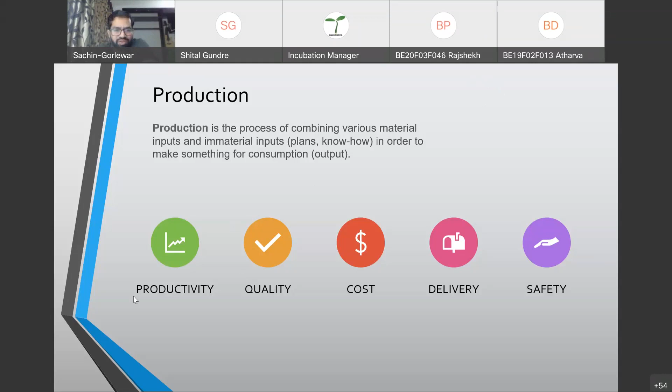Students, you may unmute yourself and you can put your answers in the chat box. Yeah. Right. So I'll move to the other part.

Now productivity, it's very simple. Productivity in manufacturing measures the number of units produced or net sales relative to employee labor hours. Okay. For example, if 10 people are working in the factory, what is the output? How much product is manufactured in a day or in an hour? So this is the definition of productivity.

Now, I'll take a very typical example where everyone can relate. Most of the students are from which branch, ma'am? Mechanical or electronics? Let me consider it's a common branch, right?

So when you see the manufacturing setup, for example, if you want to do a machining work, basically the setup is there is input, there is a machine, and there is output, and the fourth factor is a person. What the person is doing is taking the material from the input and putting it into the machine manually. Okay. And after the machining is finished, he picks the material and puts it in the output bin. So this is how the typical machining center does the work.

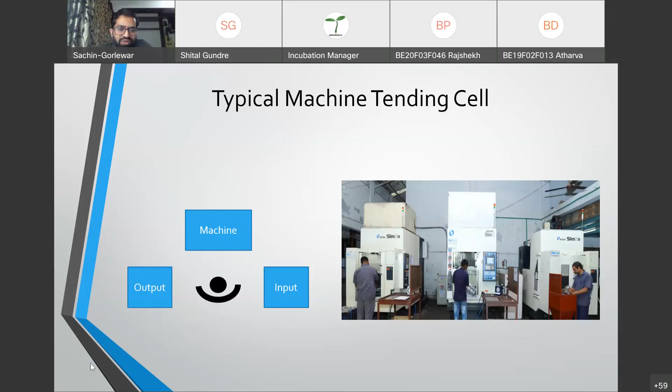Okay. Now if you go to the statistics, if you want to know how productive it is. Okay, so let us take an example.

The total working hour, usually in the Indian standard, the factories work in 3 shifts where each shift comprises of 8 hours. So you can say total working time is 480 minutes.

Typically we require breaks. For example, normally as per Indian standards, there are 2 tea breaks and 1 lunch break.

So 60 minutes is gone into it, like 10 minutes, 40 minutes, 10 minutes. So now the available time with us for working is 420 minutes.

Now there are shift change losses, like when one shift ends, another shift starts, some time is consumed into it. There is 5 minutes at the start of the shift and 5 minutes at the end of the shift, so losses total 10 minutes. So now we are effectively left with 410 minutes.

And efficiency - we are humans, so we cannot work like a machine continuously because we get tired. In the morning we are more productive, but after lunch the efficiency will slightly go down, and at the end of the shift everyone wants to go home, and efficiency drops down again. So for a standard calculation, I have considered the humans are working at 85% efficiency.

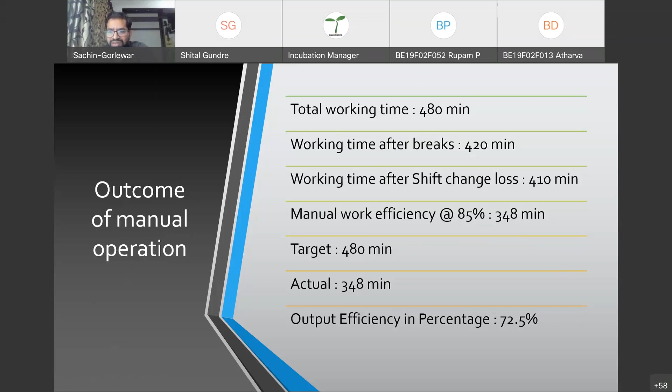Now this is a typical scenario where the efficiency we are getting is 72.5% when we are working with human beings or operator.

Now what we have done is we have implemented robotics for this. The previous setup is slightly modified, and we have added the buffer input conveyor and the buffer output conveyor.

Buffer means like we have the largest break of 40 minutes. So you should feed the robot input components which will last for 40 minutes, and there should be a space where the finished components will be kept because this cell will be running manless.

On the left side I have given the graphical representation. On the right side you can see there is a robot, there are the input trays, there is a machine and there is an output tray. So this is how it is.

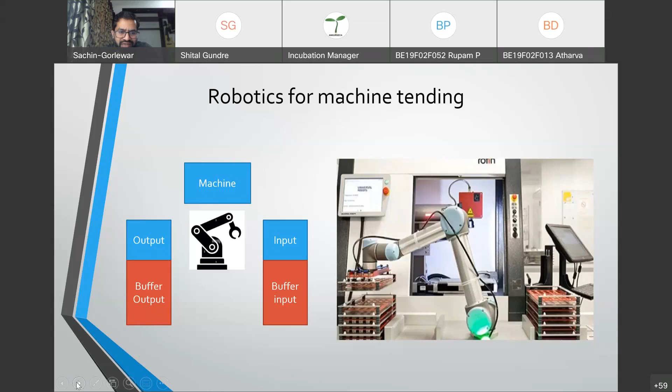Now let us see the calculation, how exactly it has helped us. So effective working time was 480 minutes. Total working time allotted for a shift is 480 minutes. We don't take - robot doesn't take any break.

So there is no loss in tea break time. Robot can work across the shifts without stoppage, so there is no shift change loss. Of course robot will have higher efficiency compared to the human being, so let us consider robots are working at 95% efficiency.

So the total effective working time available for us in the shift is 456 minutes. Available time is 480 minutes, actual time is 456 minutes. The output percentage, if you calculate, is 95%.

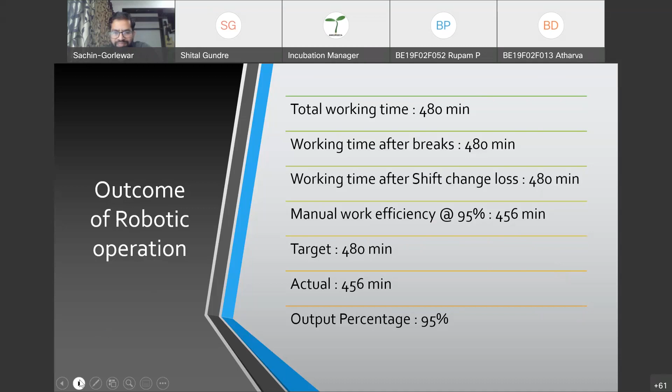So obviously when we go for robotics, we are going to get a huge amount of production benefit - our production is going to be increased. Now let us compare both scenarios.

For manual operation it was 72.5%. For the robotic operation it is 95%. The productivity is increased by 22.5%. This is a huge amount of increase in productivity.

For example, if your plant is designed to manufacture 100 units per day, and if it is operated by human beings or operator, you will get approximately 72 to 73 parts. But if you go for robotics, it will give you 95 parts. So there's a good amount of productivity increase.

On the other hand, if you have 5 machines, the productivity out of 5 machines - one of the machines can be spare. So when it is operated by human beings or manual operator, you may require 5 machines, but if you want robotics, you may require only 4 machines because your productivity is increased. So these are the benefits of implementing robotics in the production environment to increase productivity.

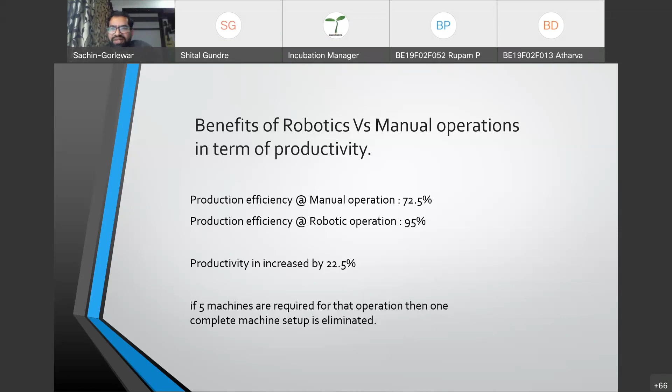Okay, so now let us move to the next topic, which is quality. See, quality is a very important factor.

Let us take a scenario: you have bought a mixer, and it was working good for 2 days, and on the third day it stopped working. Will you buy this mixer from the same company once again? No. This will give bad marketing. You will discuss this mixer issue with your friends, and your friends will also try to avoid that brand. Ultimately, sales drop down, your business starts turning into loss, your customer starts losing faith in you, and your brand gets damaged.

So what do you think, why we use Apple phones, why we don't bargain, why we are not waiting for discounts on the Apple phone? Everyone wants an Apple phone because of its quality, the build quality, the operation quality. They are spending a lot to maintain the quality, so that is why they are a very successful brand. So in order to make any product very successful, quality is the prime most important thing.

So let us see what exactly quality is. Manufacturing quality is conformance to specification. Quality of design and conformance to specification provide the fundamental basics for managing operations to produce quality products. The cost of poor manufacturing quality is high; it may have a direct impact on your sales if you compromise on quality.

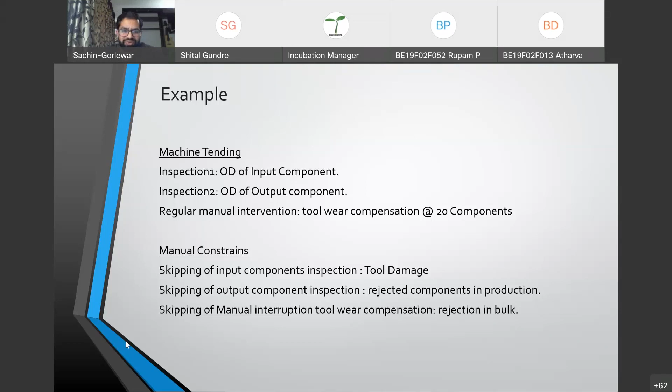So to summarize this scenario: it is very important to check the input quality, it is very important to check the output quality, and it is very important to give the tool wear compensation to the machine. Now let us see how we take care of this when we move to automation.

So here what we have done is we have ensured whatever parts we are putting into the machine are checked. So our machine doesn't get damaged and our cost is well within control.

Now, after the machining happens, we take the output component, again we put it in a gauge and we will see whether the machining is within tolerance or not.

Now, it is a very hard component and you need to give a tool wear compensation after every 20 components. So this data is recorded, and when it approaches the tolerance, the robot will automatically give the tool wear compensation to the machine.

And this is how you are completely automating the cell, and you don't have to worry about damages to the machine or the output quality. Your output quality is 100% inspected, and once your part quality is good, ultimately your product quality will be good. So this is how the robots can help maintain the quality.

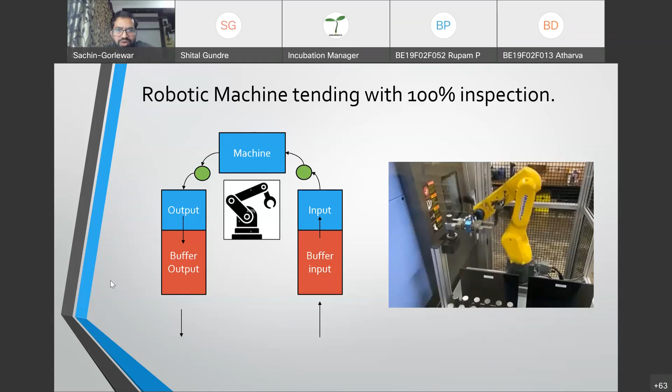Now the advantages of this are consistent quality, zero manual intervention, 100% quality inspection, increased tool life, and manless operation. Anyone have any doubts or questions till now?

I'll be very happy to answer your questions. Even you can write in the chat box also. If any student has a question, please unmute yourself. Let us have this session interactive. Yes, sir, I'll also come to know what exactly you're looking for, or what questions are in your mind. This will help me improve next time, so I can stress on that point in some of the next presentations.

Yes sir, actually the students who are working in robotics, they might be having questions in their mind regarding this robotics. Okay sir, okay, I'll continue. Yes sir.

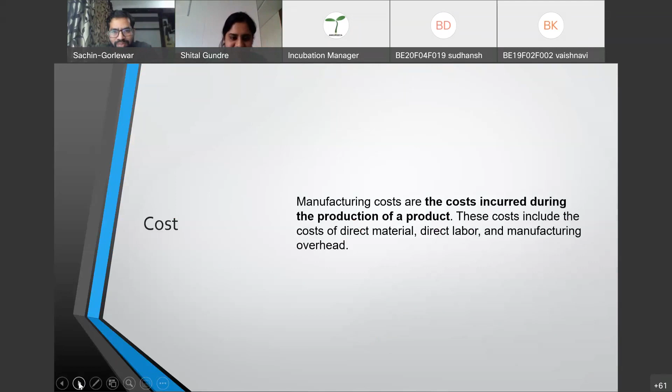Next thing is cost. Now we have seen the productivity, we have seen the quality, now it is the turn of cost. Till now what we have done is we have seen the robotics for material handling.

There are majorly robotics used in two ways: one is the process industry and another is material handling. So till now we have seen material handling. Now we will see some examples from the process industry. Process industry means the robot is not only handling the material, but the robot is helping the process. Process means welding, sealant application, painting. So these are the processes which are done by robots.

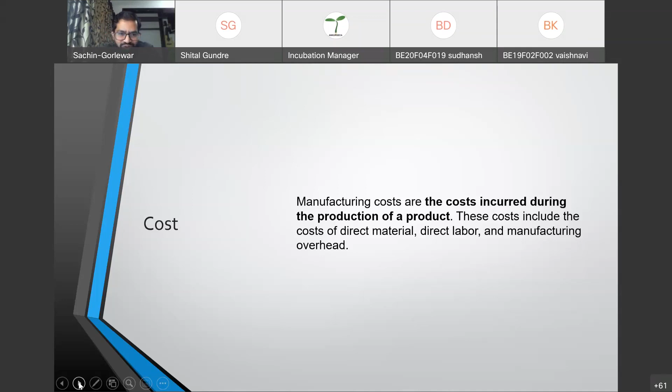Now, cost is like everyone knows, manufacturing costs are the costs incurred during the production of the product. The cost includes cost of direct material, direct labor, or manufacturing overheads. Now, I will try to explain you with one example, right?

So here I have taken the example of a sealant application. Are you aware of sealant, which is prominently used in the automotive industry?

Okay, I'll explain the sealant. What exactly is a sealant? In the automotive industry, especially in four-wheelers, when you join two parts, two pressed sheet metal parts with each other, in between we are using the sealant. There are two major causes for it. First, whenever you are driving the vehicle, it will not make a sound because this sealant will act as a damping agent in between the two sheets. And another part is it will avoid water or corrosive agents getting into the deep of the sheet metals. So these are the two causes for why we use the sealant. Most commonly used in the four-wheeler industry, not even in the two-wheeler industry, four-wheeler industry.

Now, when you see it, it is very much simpler, like drawing mehndi on your hand, right? So on the right side, what you can see is the white color on the red part is a sealant. Now here itself, you can see when the human is applying the sealant, there are a lot of issues he is facing, like getting the even bead, that is the requirement of the process.

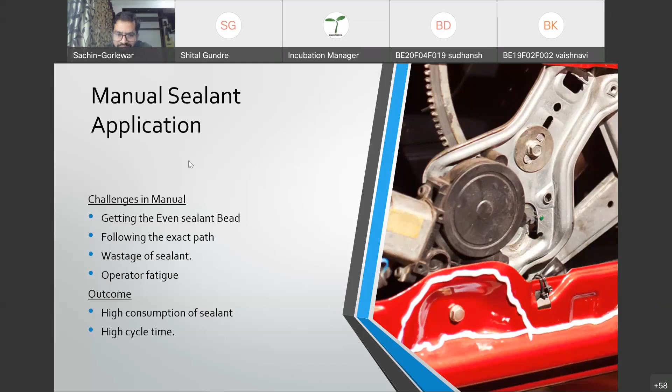For example, if it is estimated at 100 grams of sealant per vehicle, and if you do it manually, it is never 100 grams, it is 120 grams, 150 grams, because a lot of sealant is wasted because of an uneven bead, because of not a straight path; we follow a shaky path. So if you calculate the consumption of sealant, it is always going to be higher in the case of manual operation. Now let us see the benefit when we do it with the robot.

On the right side, I have not shown the robot, but you can see the gun, and you can see the quality of sealant. It is very even, within the path, within the straight line. So when you go for robotics, your consumption of sealant is highly reduced. That is the cost. For example, if it is 100 rupees per vehicle, initially you were spending 150 rupees. Now the cost has been reduced, and this is for every car.

So if you are manufacturing 10,000 vehicles per day, you can imagine the cost saved. So when it comes to mass production, of course, you have to go with robotic procedures in sealant application. This will help you save a lot of consumables. So this contributes to the cost. When you apply robotics in the process industry, it is definitely going to help you reduce the consumable cost.

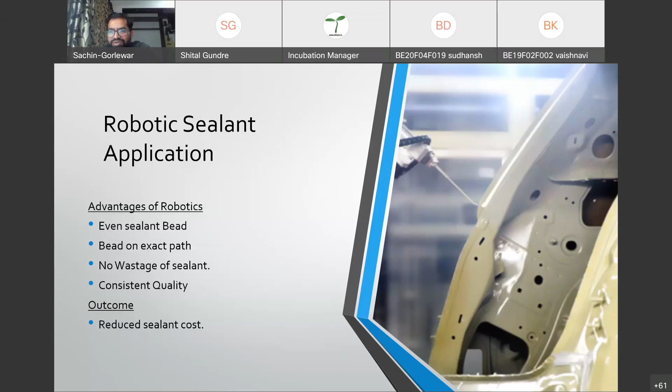Any questions till now?

Sir, what is the process to maintain the efficiency of the robot during production? When we say a robot is 100% efficient, once you do the programming, it will keep on continuously working, but still we consider 95% or 98% efficiency. Why? Because it also should get the input components. If the input components are not fed, or if there is a gap in feeding them, the robot has to be idle because it doesn't have anything to work on.

And the minor stoppages, like it doesn't have the component, there is a line stoppage, conveyor issues or a fault in the conveyor. So with this, we consider it to be 95% efficient. But if everything is working fine in ideal condition, it's 100%.

So Sudhanshu Doble, right? Yeah.

One more question from Gaurang Kulkarni: generally, what kind of materials are used while making a robot? What factors are considered? See, a robot basically has three major parts. All robots have servo motors. They have absolute encoders, gearboxes, and castings, aluminum castings. And manufacturing a robot is a very high-precision job.

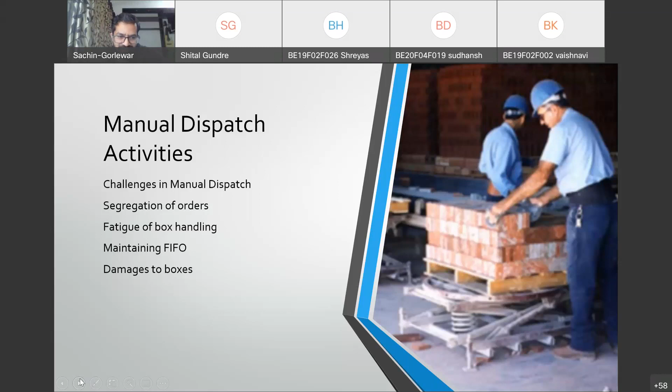So dispatch is the activity where delivery is important. The problems are segregating orders, fatigue, box handling, maintaining FIFO, and damage to boxes. When we implement the robot, we get a lot of benefits, like accurate segregation. On the right side, the boxes have labels. If the robot is catering to 4 orders at a time and there is only one input channel, any type of material can come in.

So what the robot does is take the box, show it to the barcode reader, segregate it and place it properly. So fatigue, speed, and accuracy of dispatch are maintained. This is how robotics can help in dispatch activity for delivery.

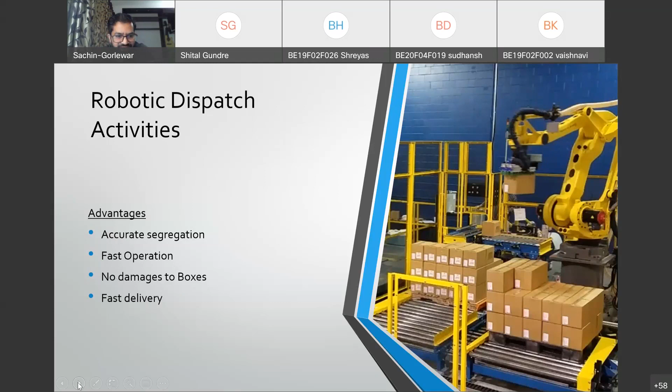Safety. Safety is a very important factor, both for legal, industrial and factory laws, and for human beings. We cannot play with the lives of human beings. If I have a factory with a dangerous working environment, I will try to implement robots first in the dangerous environment, because humans are important. We cannot push humans to work in very dangerous environments.

Productivity and quality can come last, but safety is first for me personally. Giving a safe environment to the workers is the foremost focus of the industrialist. So let us see how robots play a role in safety.

Moreover, they are using argon and carbon dioxide gases. So it's a very unhealthy environment, also time consuming, and quality and a lot of stuff is there. So if you implement robotics, the robot is pushed into the harsh environment, because the robot is not going to breathe. So it is not going to impact him, but we breathe and we have to be away from this type of dangerous environment. So welding is one of the areas where robotics is used massively. In a country like India, we use robotics mainly in the welding area.

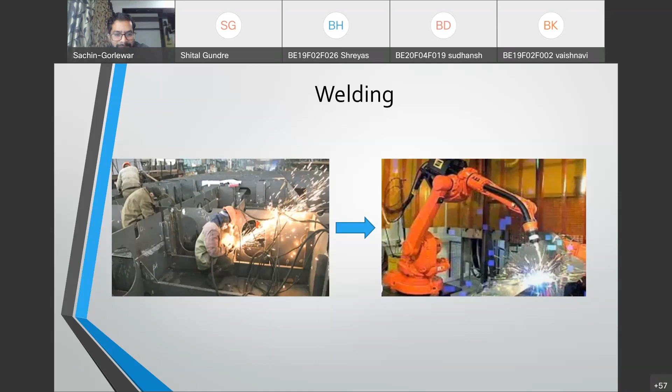Painting is one of the areas with a lot of dangerous environment: isoethanol, prophenol, thinner, paint smell, tiny paint particles. So this environment is very dangerous, and people can work in it with PPEs, personal protective equipment, but they cannot put on this equipment, for example a mask, for 8 hours. When I was in Bajaj, every painter was allowed to work only 4 hours in the paint booth. After that, he was given regular work. That is how harsh the environment is.

So after implementation of robotics, we push the robot into the harsh environment and we free human beings from the dangerous environment. So by implementing robots, painting can be very much safe.

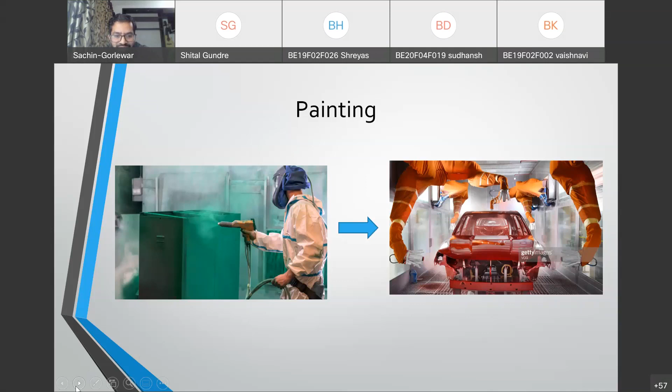Similarly, another application is spot welding, which is mostly used in four-wheeler automotive, where they are using heavy guns. Even though they are tied to a zero balancer, it is still fatiguing to position the gun at the particular point, and you cannot do it for 8 hours. It's a very terrible job. Your muscles will start paining like anything, and the robot has made life easy in this case.

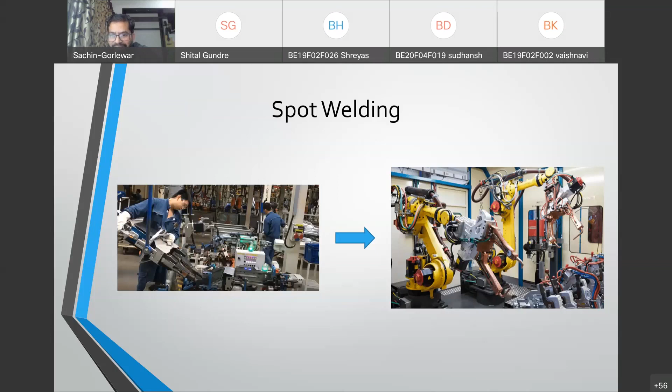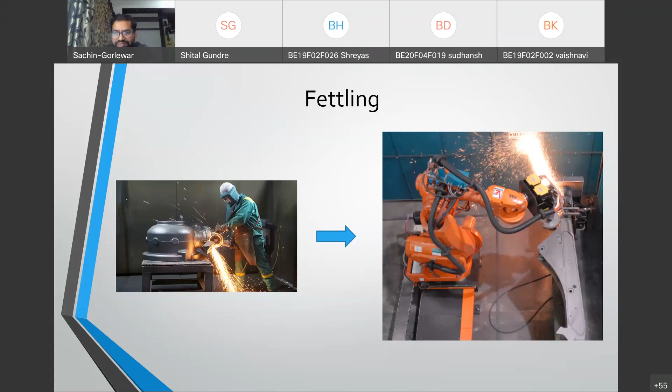Fettling, anyone aware of fettling? Fettling is mostly found in the casting area. After casting, like when we do a two-part mold, at the joining part we observe flashes on the casting, and normally they are removed by a human being with a grinder. Again, very unsafe. A lot of injuries happen in that case. So robots have now been developed to take care of fettling also. Fettling is one of the areas where robots are used extensively nowadays.

Press tending. This is a very common application across industry, two-wheeler, four-wheeler. And the very unfortunate thing is, among the operators running these machines, on average one hand is cut every month. Like every month, one or two persons are losing their hands. Why? Because they are stressed for productivity. They are paid on the number of components they produce. And with this, they try to produce more components.

It is not that presses are unsafe. Presses are very safe. They come with dual press buttons, two buttons on two sides. So when you put the component and press the two buttons simultaneously, only then will the operation happen. Pressing the two buttons automatically ensures your hands are out of the press. But in Indian industry, they combine the two buttons and make it one button. So one hand they use for loading and unloading, and one hand for switching the press on.

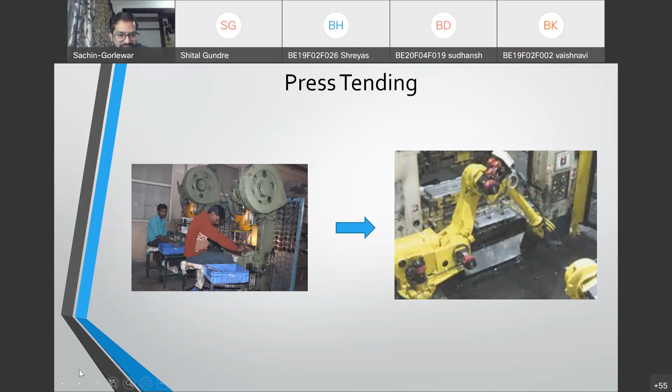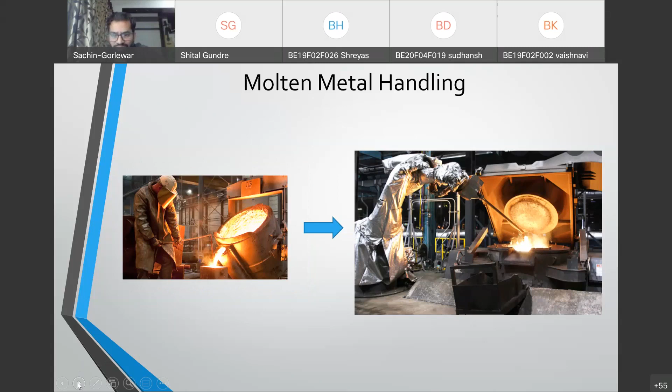Molten metal handling: the picture itself suggests how dangerous it is. Nowadays, it is taken care of by robots. So if you see, when we use the robot, we started with product development, from which we came to know that commercialization and rollout is a very important factor, because that is going to decide the fate of the business. In order to make a successful commercial rollout, we should have an excellent production system. The production system can be excellent when we have good quantified results for productivity, quality, cost, safety, delivery.

And when you try to implement robots, I'm not saying you need to implement everywhere, only wherever the pain point is. For example, if quality is the most important, you try to implement robots in quality. If it is the FMCG sector, volumes are very important because their margins are very low. They have to move with a very high speed, so they have to go for robotics and automation.

Pharma has to go for minimum manual intervention, because it's medicine, it will heal or kill. So they cannot afford mistakes. For them, robotics is important from a minimum manual intervention perspective; automotive, from a safety perspective. So every sector has its own problems to solve with robotics.

And when you use the robot, what you have achieved is improved productivity, consistent quality, reduced cost, faster deliveries, and a safe environment for the operator. What is the result? Your business is profitable, your business is scalable, your customer is satisfied with the quality, and you always have a competitive edge over competitors.

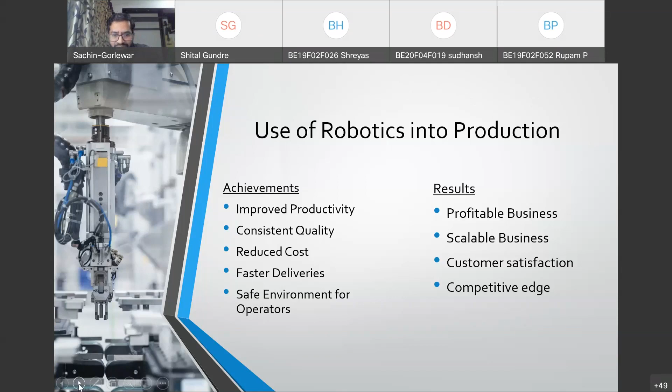After discussing a lot on robotics, you must be wondering what exactly the scenario of robotics is across the world. So I will share some of the facts. There is an agency called the International Federation of Robotics, which is governing the growth of robotics in the world. So this is the worldwide sale of robots. Annually, believe me, it is growing tremendously for the last 5 to 6 years. I have the figures.

2015, it was 2.5 lakhs. 2016, it was 3.04 lakhs. 2017, it was 4 lakhs. 2018, it was 4.2 lakhs. 2019 and 2020 were impacted by COVID; that is why the sale has gone down. But 2021 onwards, it is predicted to grow with 13% to 16% CAGR. So this many robots are sold across the globe.

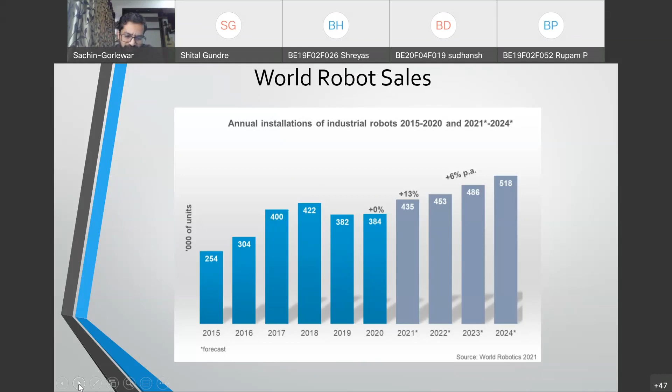Why is Chinese material so cheap? Even if we try to manufacture something in India, it is becoming very costly. The thing is, they manufacture in mass volumes with the proper technologies. India is still growing and moving towards this process of adopting robotics.

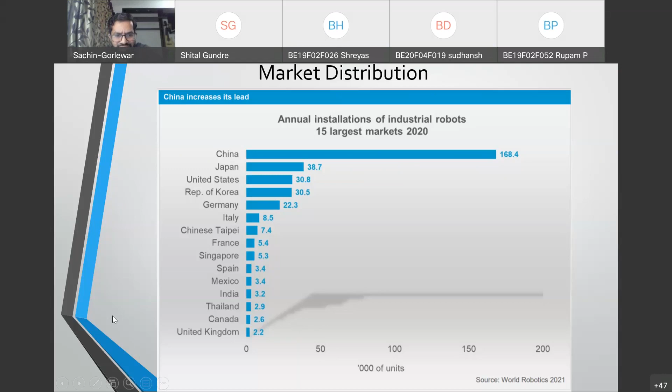Yeah. So another factor is when you want to see the density of robots. There is a term or unit which we call robot density.

It has improved a lot. Initially it was 1, now it has improved a lot, but still there is a lot of scope for improvement for Indian industry to implement robotics.

So with this, I think I'm done. I'm open for questions. How did you guys feel about this lecture? Was this adding any value to you? You can give your feedback. Does it make sense to you, or what would you like to hear?